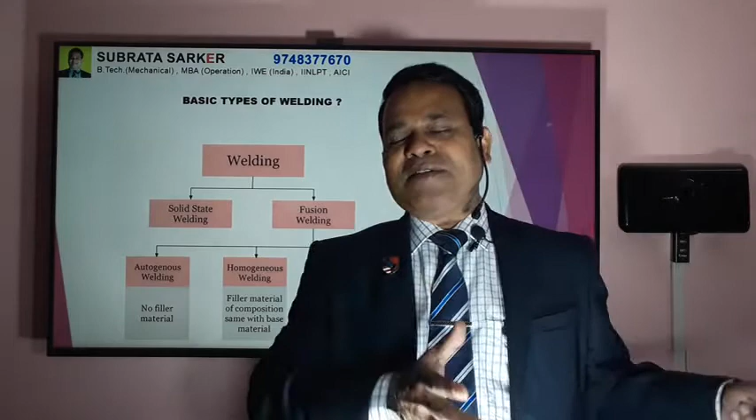It has also got different sub varieties for the welding process, which today we are not going to discuss. We'll be discussing only metallic material welding.

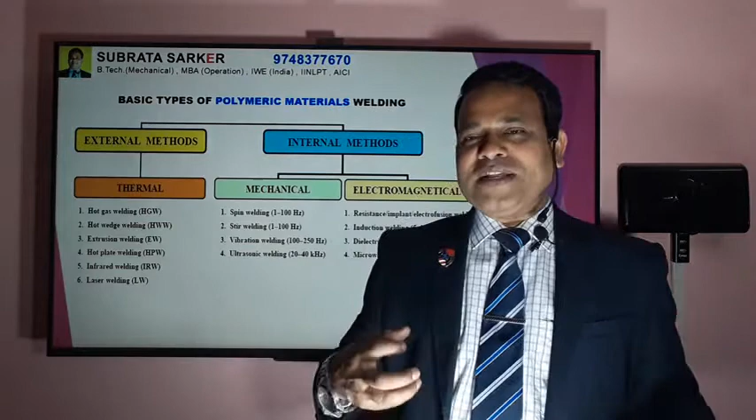Now basic types in metallic material welding: one is gas welding, mostly used for sheet metal where joint strength is not much needed. Resistance welding is used only for sheet metal applications in the automobile industry. Arc welding is majorly used in the fabrication industry for shipbuilding and heavy construction, like MIG welding, submerged welding, etc.

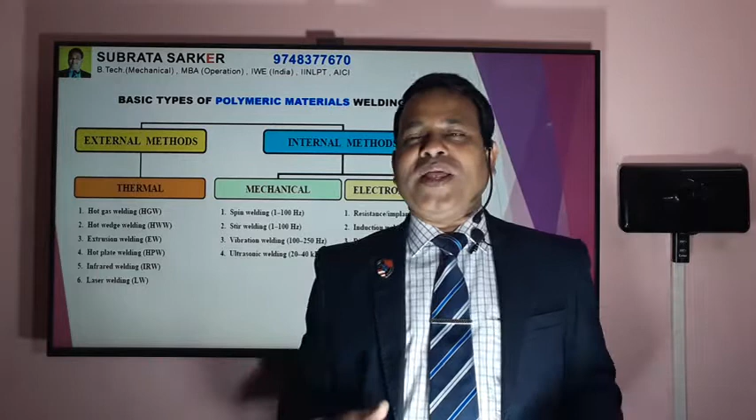And there are newer welding processes like EBW welding, electron beam welding, and laser beam welding. This is a special area of application where this welding is used.

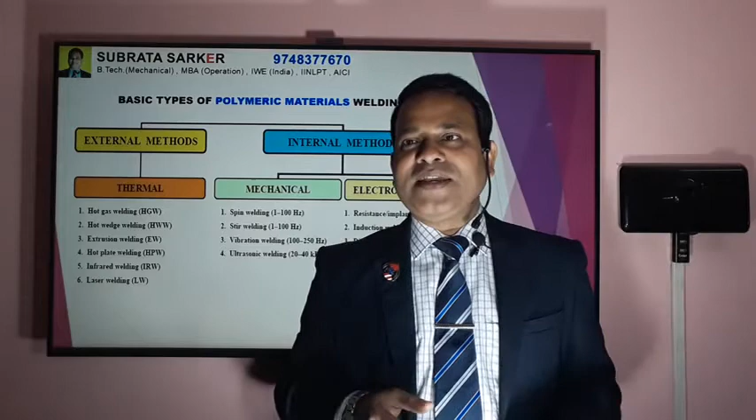And there is another category of welding, called solid state welding, under which comes friction welding, ultrasonic welding, diffusion welding, and explosive welding. I'll be discussing today in detail this ultrasonic welding, which is basically a solid state of welding.

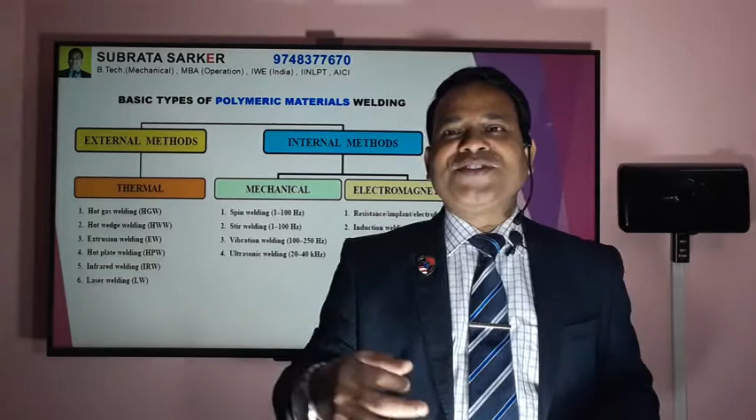Now, before getting into this subject, I would like to share that welding is also one of my most favorite subjects, other than other mechanical engineering subjects.

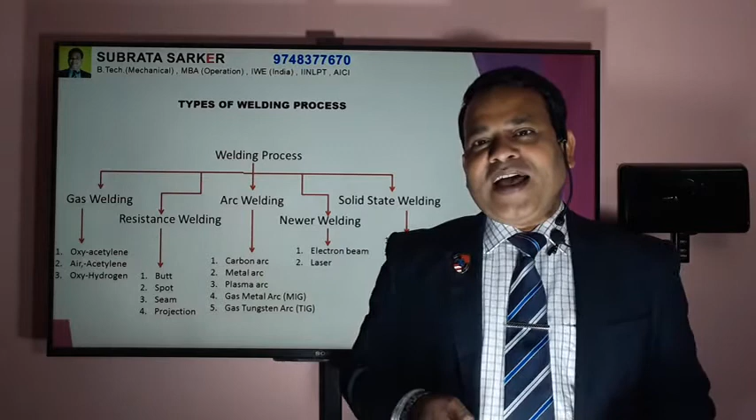Other than my engineering graduation, I've also done a section of BTech from Jadavpur University only on welding technology in collaboration with IIW, and I'm also an international welding engineer certified from IIW. One of my previous companies, when I was working in Germany, was Ultrasonic GmbH, where I also learned a lot of special welding processes, like friction welding, submerged welding, laser welding, microplasma welding, and ultrasonic welding. So today I'll share one of these areas, ultrasonic welding, which you will normally not find in common industry - it's a very special area of application and special category of welding.

Now ultrasonic welding, which we are going to discuss today - what is ultrasonic welding actually? Ultrasonic wave, in the range of 15 to 60 kilohertz, is applied on a metal surface, and that friction creates heat which converts into welding. This is basically ultrasonic welding.

It has got special equipment for that, and it takes only about 2 to 3 seconds to join the two materials. It can be applicable with metal to metal, metal to non-metal, and non-metal to non-metal. This is a very special process actually.

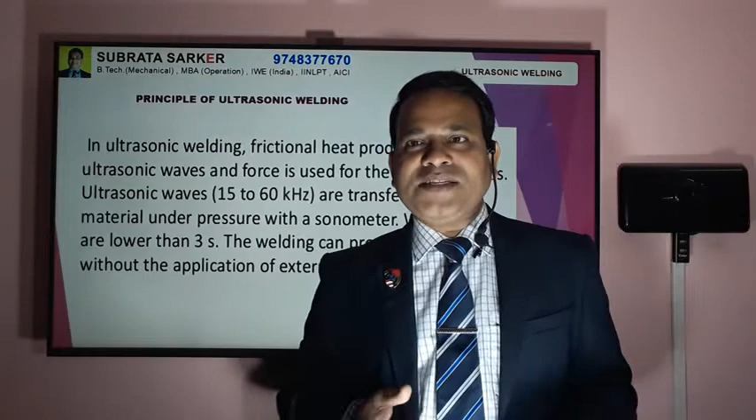So the process basically - say there are two sheet metals you want to join. You are putting ultrasonic vibration on the metal, then this vibration creates frictional heat, and you put pressure on both metals and it gets welded. This is very simple, but it's a very special process actually, ultrasonic welding.

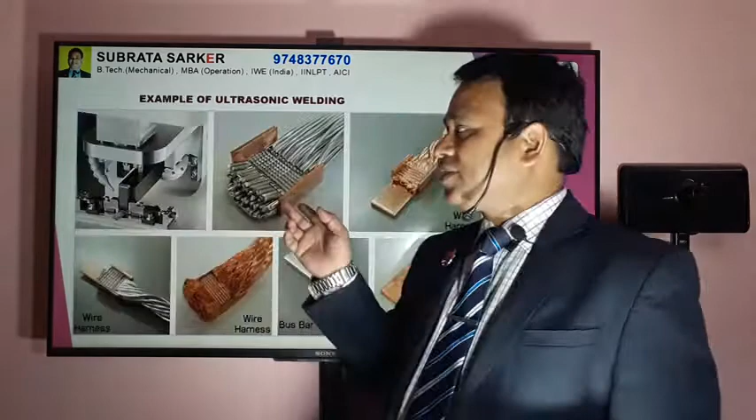And ultrasonic weld is typically used mostly in industry. You will find it inside electrical control panels, in bus bars, and a lot of harnesses where ultrasonic welding is used, as you can see here in this picture. Other welding processes are not suitable actually.

This ultrasonic welding is done in most of these cases, and it's portable also. It can be done in any place. It is just like a pneumatic gun actually.

And you can see here in industries like air conditioner industry and refrigeration industry, where a lot of welding or joint requirements are needed for non-metallic material, ultrasonic welding is done.

Ultrasonic welding can be done for very thin sheets also, like 50 micron thin sheets, which we don't call sheet, we call it foil. So foil can be joined by this ultrasonic welding, and it doesn't get distorted.

But some limitations are also there. Ultrasonic welding is a very special welding process, so it needs a very skilled operator, and the surface finish of the component is a very high requirement. And it is very difficult to detect if there is a defect in the welding - very difficult to identify. This is one of the drawbacks of ultrasonic welding actually.

But there are a lot of advantages of ultrasonic welding. One is the heat affected zone is very minimum. It's very thin metal you can weld, like for any special container, sealed cover, etc. And surface deformation is almost nil. For thin material welding, there is no distortion due to heat, or weld discoloration from heat generation.

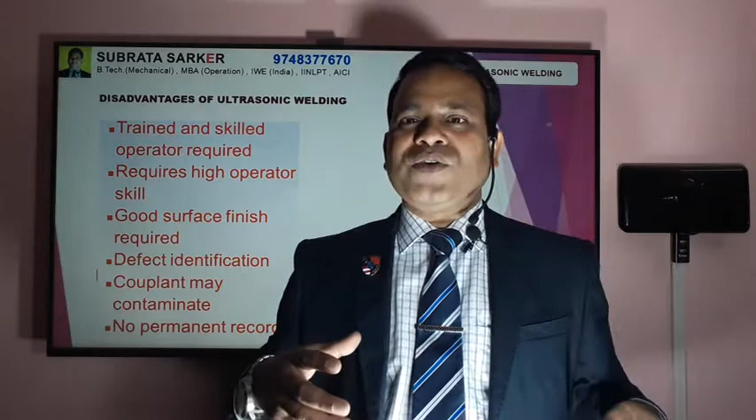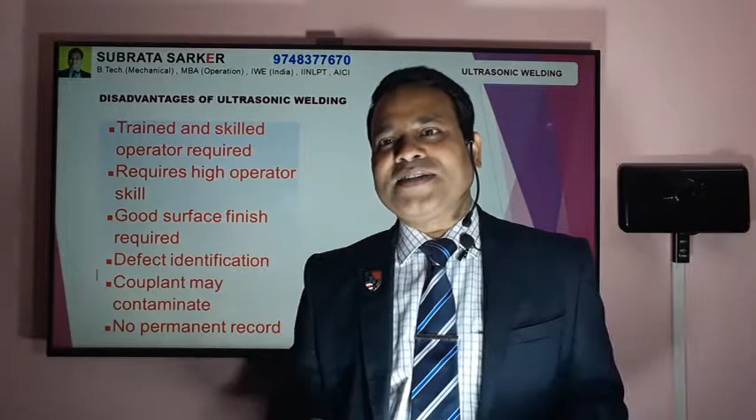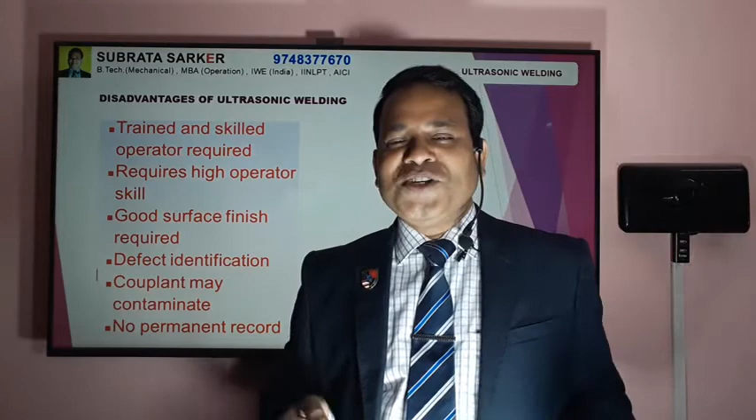And because there are no defects due to external gases, arc, or filler material - since those are not needed in this process - dissimilar metal can be joined, as I said already. But one of the most important and unique things actually, glass can be welded by ultrasonic welding, which we just cannot think of - how glass can be welded by a welding process. But ultrasonic welding can do welding of glasses also.